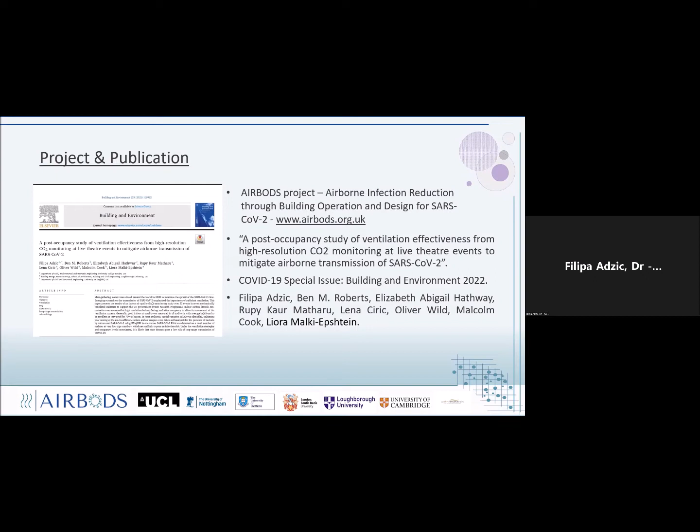We can all remember the closure of mass gathering events, which proved crucial in pandemic mitigation from very early on. In the first 12 weeks, over 15,000 theatre shows were cancelled, causing a huge loss in box office revenues. In Spain and Germany, governments initiated research programs to investigate the spread of SARS-CoV-2 in mass gathering events, and the UK government followed, setting up the Events Research Program, the largest program of its sort to date.

The aim of this program was to provide evidence allowing the government to assess and mitigate the risk of mass gathering events spreading the pandemic. The Events Research Program was organized in 3 phases and ran between April and July 2021. A range of venues over different occupancy events were monitored, and because of the project's impact, data collection, analysis and reporting had to happen very quickly, usually with just a couple of days for collection and analysis of data. So you can imagine this was quite an intense time.

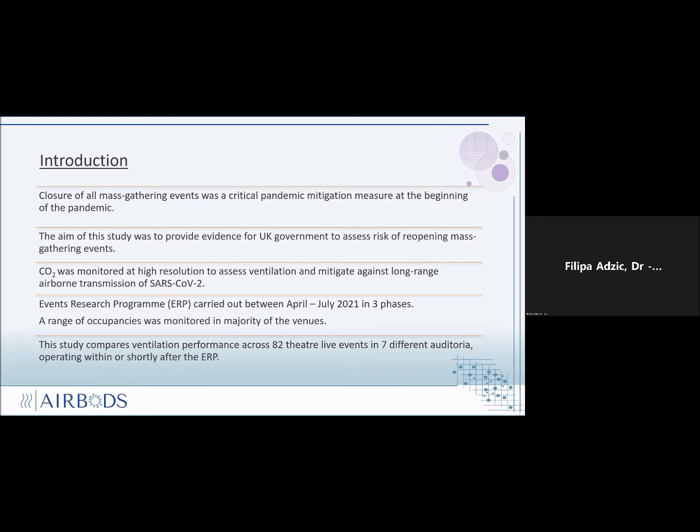Amongst other research methods, high-resolution CO2 monitoring was deployed to assess ventilation provision in different spaces within these large venues. As part of the ERP, we also monitored different events including sports venues and nightclubs. But today I will focus this talk on monitoring 7 different theatre auditoria over 82 live events operating within or shortly after the Events Research Program. I'm very happy to give this talk because personally I'm a big fan of the theatre.

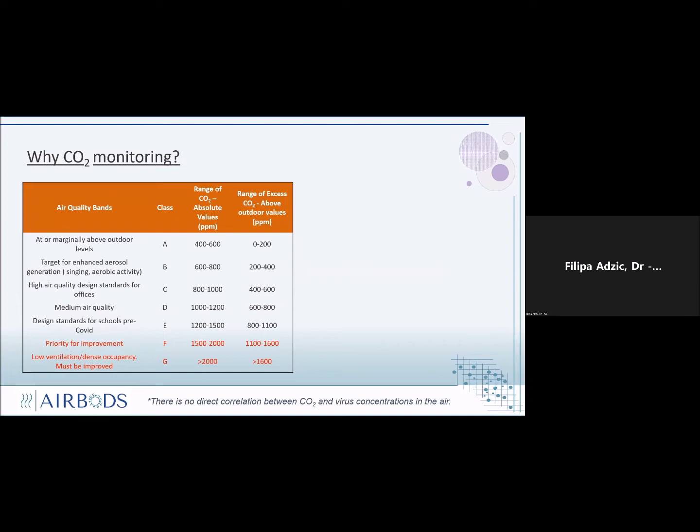So why did we do the CO2 monitoring? As it's widely known, ventilating indoor spaces dilutes and removes airborne viruses - we've all heard this story before. CO2 and virus concentrations in air have no direct correlation, but CO2 can definitely be used as a proxy for evaluating ventilation.

I wanted to briefly go through this table developed for the Events Research Program by our group, used mainly to classify the spaces we monitored quickly. This table was developed based on existing British standards, SAGE and CIBSE guides. To give you some perspective, medium air quality in this table is the normal expectation level for an office, and spaces classified as F or G for prolonged periods of time are identified as priority for improvement.

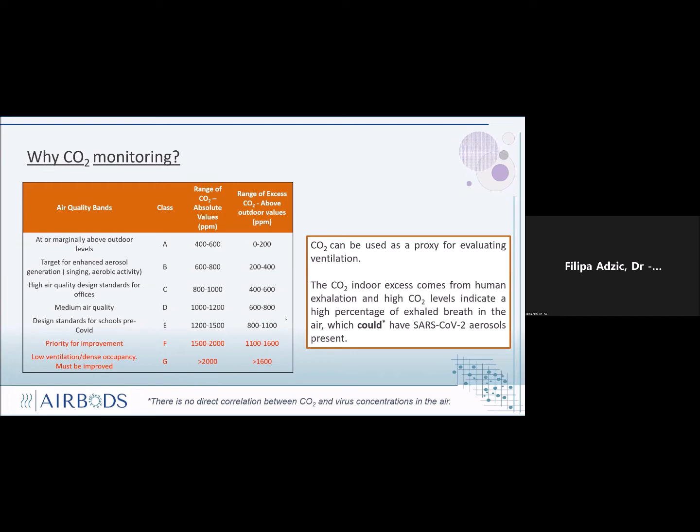Just a brief overview of the venues and events we monitored - it's quite a nice mix of spaces. Some venues, such as Piccadilly, Lyceum and Grange theatres, are more than 100 years old, while others such as Crucible and the Playhouse in Leeds were built in the last 50 years, and the O2 Arena and the ACC Conference Centre in Liverpool were built in the last 20. In total, 7 venues were monitored over 82 events with varying occupancies, and they are also different period buildings.

They all had mechanical ventilation in the auditoria - some were supplying air beneath the seats and extracting at ceilings, others were supplying at high levels and extracting below the seats. So it's really a mix of mechanical ventilation strategies.

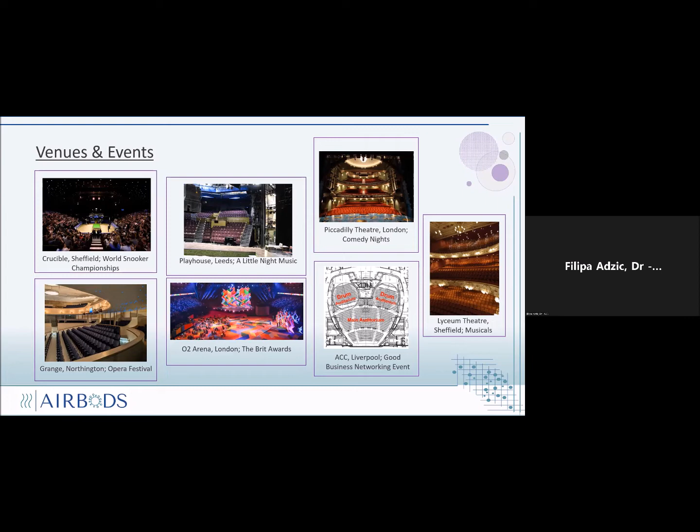Here's a brief overview of how we monitored the CO2 - you can see the little sensors we used. They logged CO2, temperature and relative humidity every 2 minutes. The majority of the sensors were installed at the back of or under the seats, within the breathing zone of occupants, and away from ventilation components such as inlets. Sensors transmitted data through gateways into an online dashboard, which could be monitored by the research team during events, but we also logged the data for detailed analysis afterward.

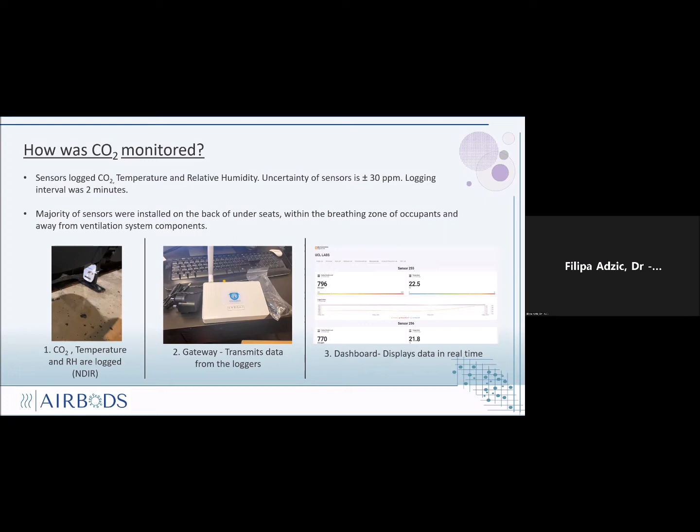So when I say high resolution monitoring, what exactly do I mean? Mostly, I mean installing a large number of sensors within one space, such as an auditorium, and separating the space into multiple monitoring zones. You can see how zones might be defined in a single space in the top image here. Each zone would have 2 sensors and would consist of a few rows grouped together.

Apart from monitoring one space at high resolution, multiple spaces within these venues were also monitored based on their use. It's important to note that in theatres, not all spaces are for performance watching. There are also bars, which are used completely differently, arrival areas, and dwelling areas. So it's important to keep in mind that it's not just the auditoria.

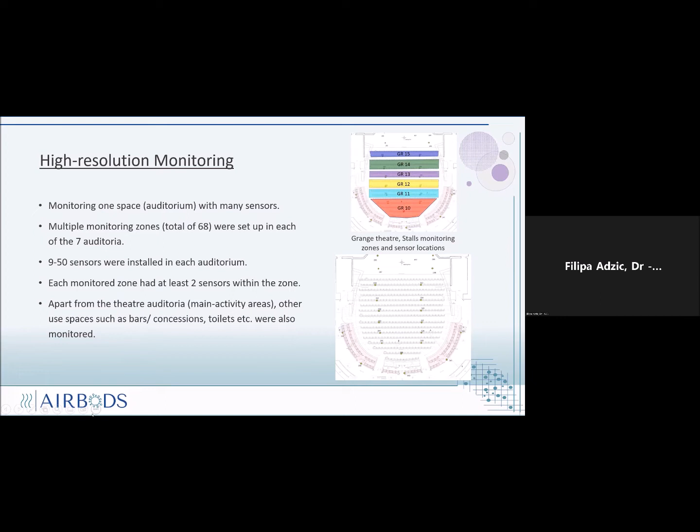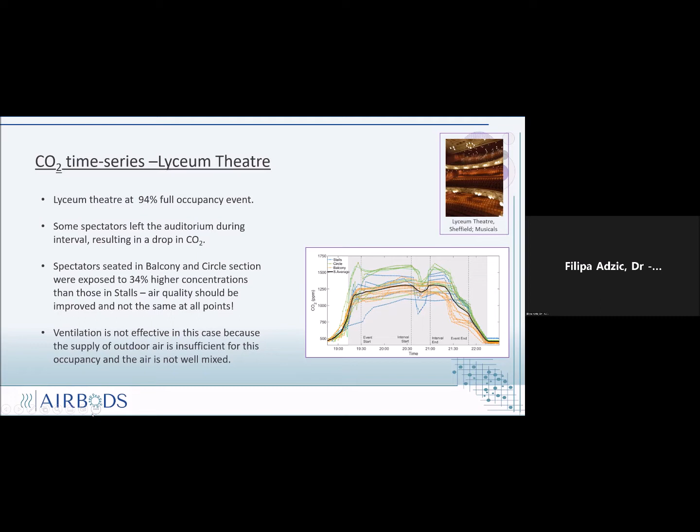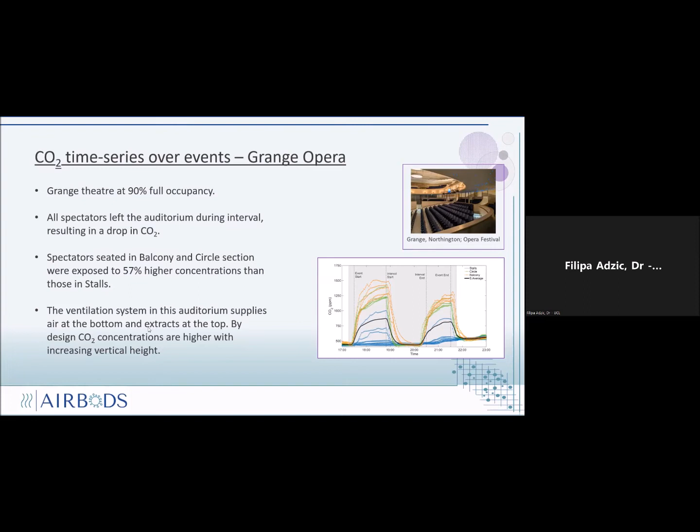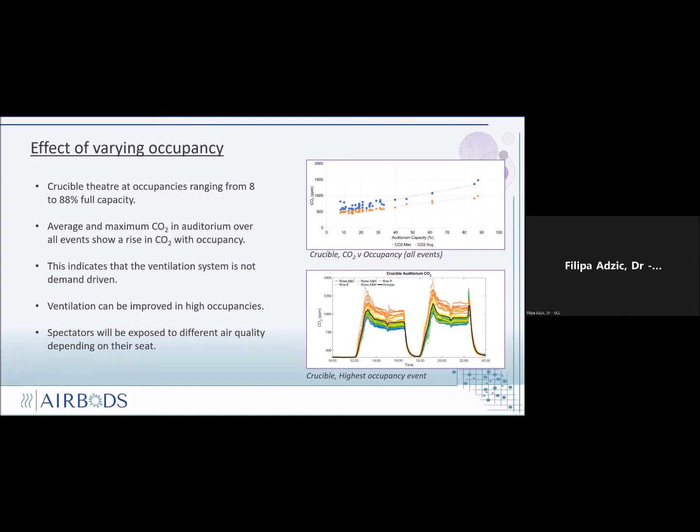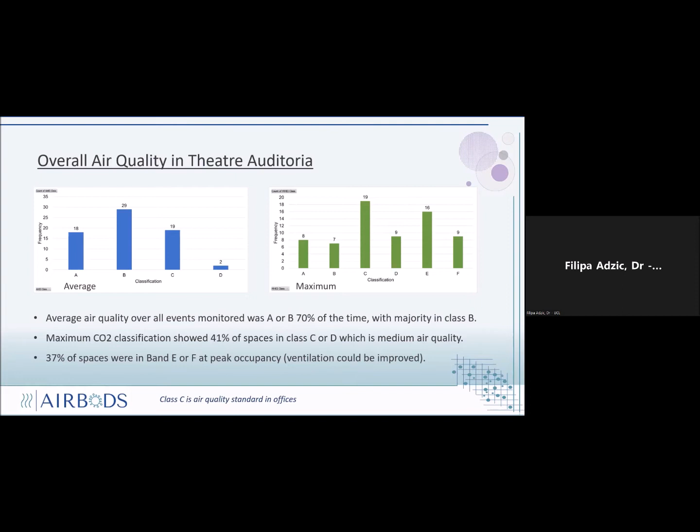To make some conclusions, high resolution CO2 monitoring allowed us to identify if the air in theatre auditoria is well mixed and distributed. This is very important, as effective ventilation doesn't only depend on ventilation rates, but also the appropriate distribution of outdoor air to all areas.

In the theatre study that we published, we made a recommendation that event intervals can be used to reduce CO2 concentrations and overall exposure to exhaled breath. But it's important to bear in mind that crowding issues in other spaces within the venue can occur.

Overall, most zones within the auditoria had an average of A or B class air quality, which is good. CO2 monitoring can be used to inform quickly about areas that need improvement and in which scenarios improvements are necessary. This was highlighted during the events research program when we had to deliver results in seemingly impossible deadlines.

Finally, high resolution monitoring does not have to be permanent. It can be only temporary, and this can provide very valuable answers in a short time period.

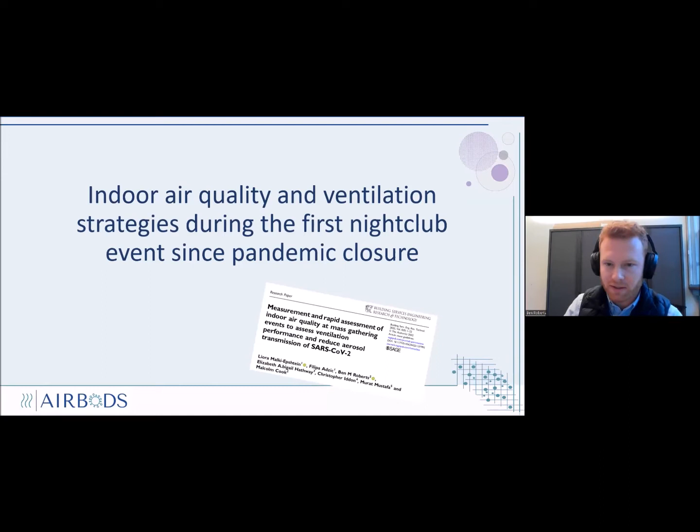This was the first ever nightclub event to open after the pandemic. We were lucky enough to be in there monitoring air quality, and we've got a paper accepted to be published very soon on this. The nightclub event was held over 2 nights, the 30th of April and 1st of May in 2021, and they packed 3,000 people into a large warehouse in Liverpool.

It really was a huge space. We had 33 CO2 sensors placed around in cages, which we thought would be a good idea because 3,000 young people having been locked away for a year might be a bit rowdy. But as it happened, they were all very well behaved and we recovered all of our sensors.

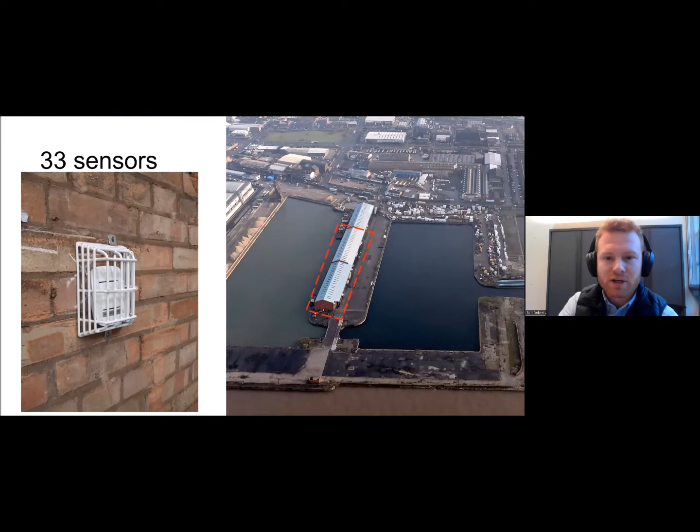It was a huge space with huge ventilation openings, 160 meters long with 7 by 7 meter ventilation openings. There were 6 of these huge doors, only on one side, so there was no ability to cross ventilate, but there was certainly the ability to have sufficient ventilation through these openings.

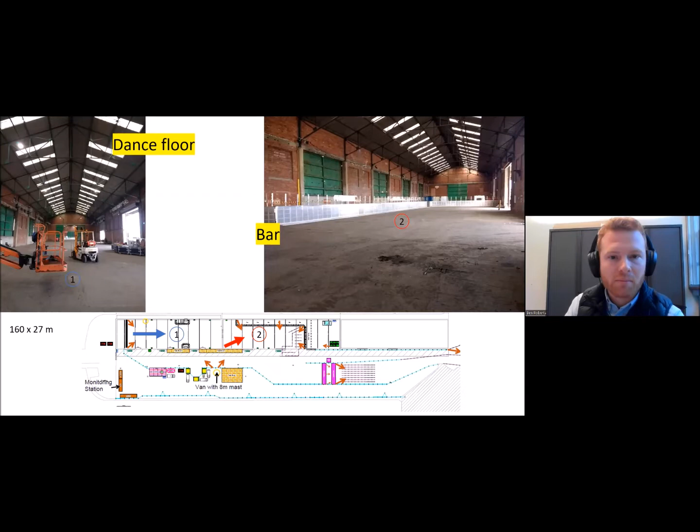We had 2 main parts of the warehouse: one end was a dance floor, the other end was a bar area. The dance floor area had these huge doors, and they pulled the shutters down halfway and then put plastic butcher screens across.

This was all about trying to reduce air and noise moving in and out of the venue, but it actually had the effect of stopping air from moving in and out. The bar area, down at the far end, had the full doors open throughout the event. Here's just an example of butcher screens, in case you don't know what I'm talking about.

So the event kicked off, 3,000 people packed into this warehouse watching a variety of DJ sets. And here's some of the results.

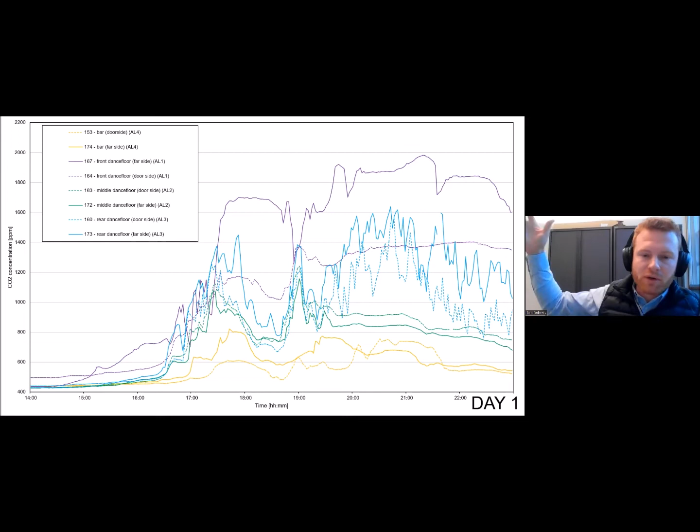The bar area, at the far end with the 3 big open doors, is this yellow line along the bottom. Throughout the event on the first day, the CO2 levels remained quite low, which indicates a reasonably low risk of exposure to exhaled breath, which may or may not be contaminated with virus-laden aerosols.

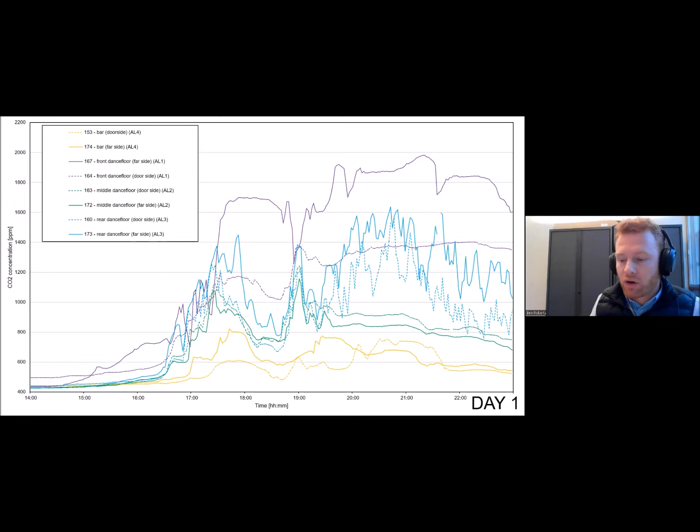However, close to the front of the stage, where people were densely packed and those ventilation openings were blocked, CO2 levels were much higher, particularly on the far side, furthest away from the door. CO2 levels remained quite high through the majority of the event, from around 5:30 in the evening all the way up to the event closure at 11 o'clock at night, staying at least above 1,600 parts per million, which indicates a high level of occupancy relative to the ventilation available.

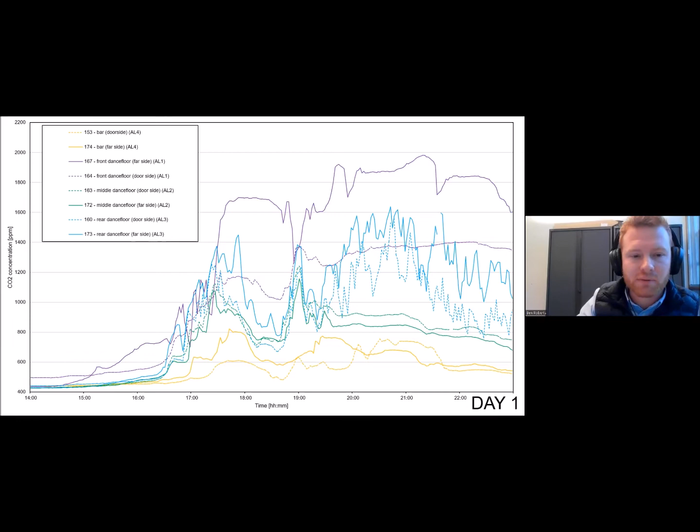So just to explain graphically, the worst place to stand if you were wanting to get exposed to other people's exhaled breath was at the front of the crowd.

The best place to be was right at the back in the bar area, having a drink, popping in and out of the big open doors.

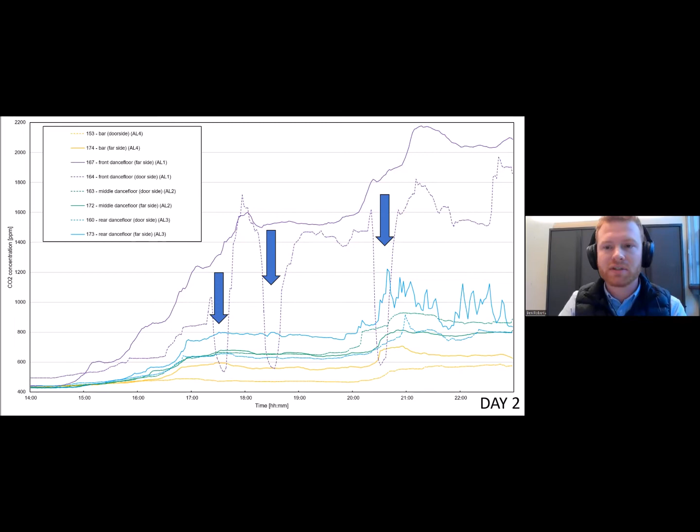So what this tells us is that had these doors been open, ventilation potentially would have been sufficient for the number of people, but it was because the doors were closed that caused the problems. So we had very high CO2 far from the door, but intermittently lower CO2 close to the door openings.

We were very pleased that some of the events were covered in the newspapers. It's not often that ventilation research makes the front pages.

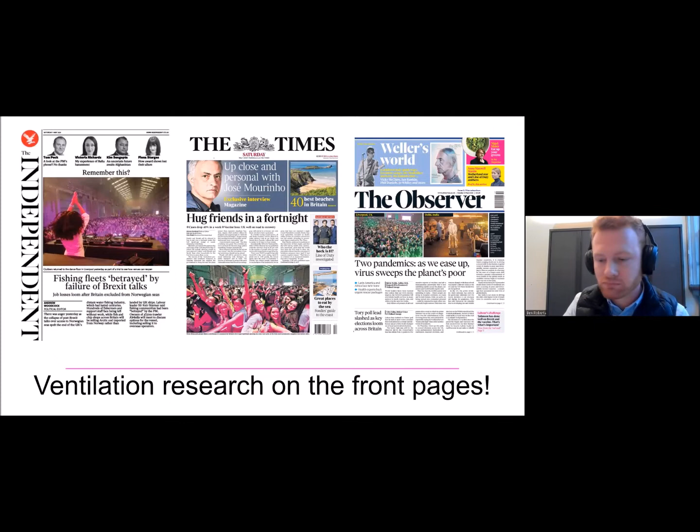We've got two papers. One's a conference paper, which has already been published, which you're very welcome to go and have a look at. Another paper will be coming out very soon. There's also a blog on the AIRBODS website, which you can go and have a look at.

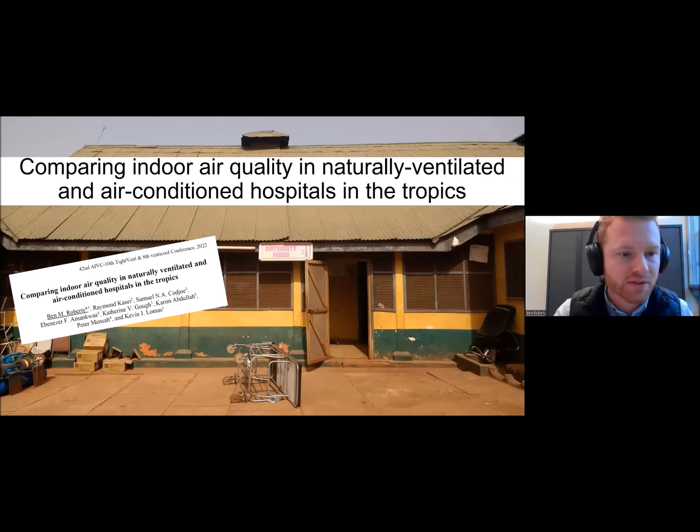The second part of my presentation, for a bit of variety, is talking about some of the work I've been doing in naturally ventilated and air-conditioned hospitals in the tropics. I recently published a conference paper on this, which you're also welcome to go and have a look at if you want more information.

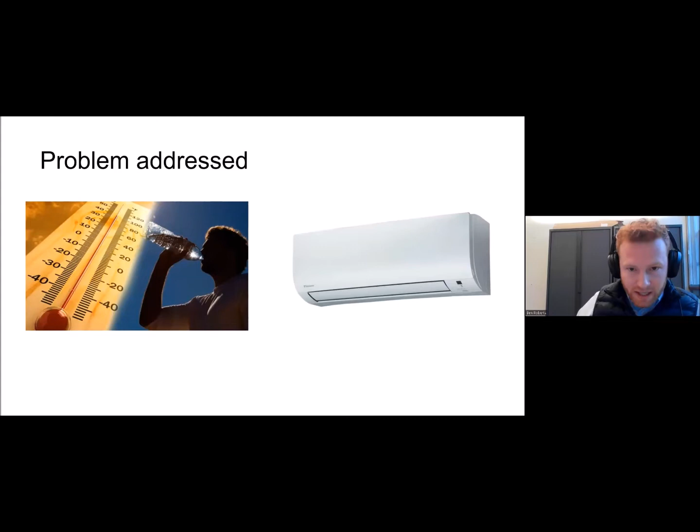Climate change is driving increasingly high temperatures, particularly in the tropics, which are already very hot places to be. Because of that, hospital buildings are increasingly being retrofitted with air conditioning units, which are recirculating air conditioning units that provide cooling without introducing fresh air ventilation.

So the aim of my project is to use ventilation to provide low or zero energy cooling whilst diluting airborne viruses and preventing mosquito-borne diseases. That's not just a case of opening up and allowing maximum amounts of ventilation, because that would potentially let mosquitoes in. So I've got four hospitals in my study.

I'm just going to present some of the results from two of the hospitals today. In some of the wards, we have mechanical ventilation, particularly in the modern hospitals.

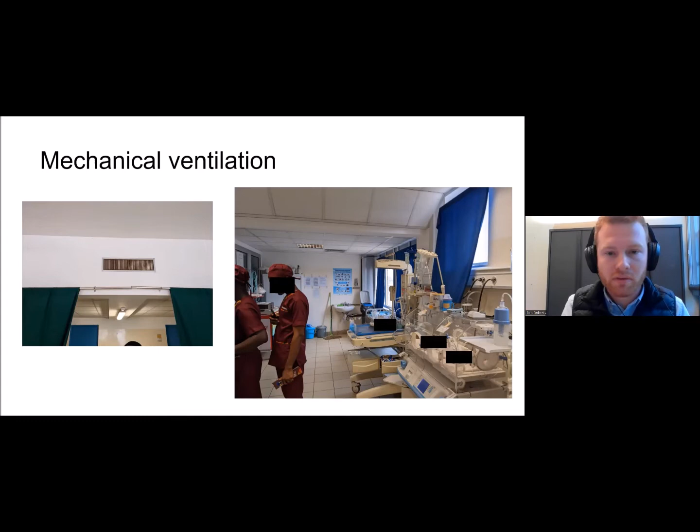The image on the right is a neonatal intensive care unit. So we have very vulnerable occupants, small babies, who have such little fat content in their body that they're not able to maintain their own internal temperature. So we have to provide a thermally comfortable environment for them here.

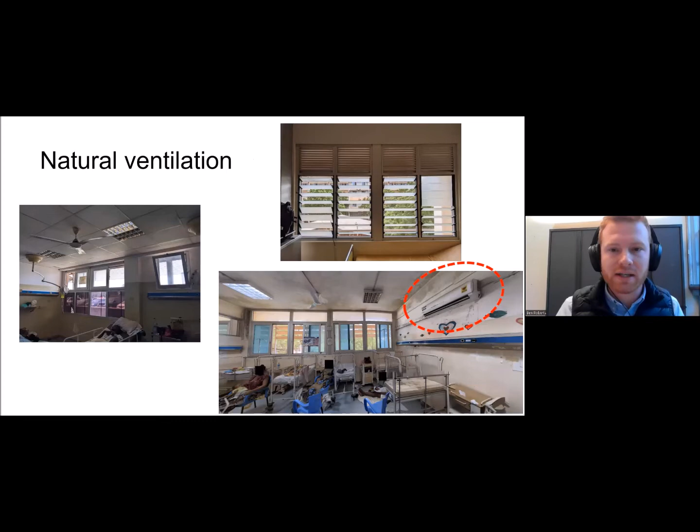But in most of the other wards, they are naturally ventilated with either louver windows in the older hospitals or sliding windows in the new hospitals. On the right-hand side, I've circled in red one of the recirculating air conditioning systems that's been installed. The wards can be very crowded, so not only have we got patients in there, there's usually visitors and also a large number of nurses, doctors and trainees.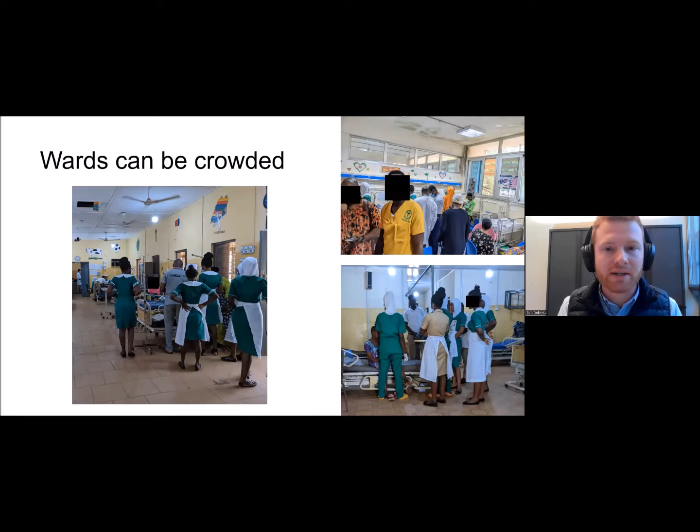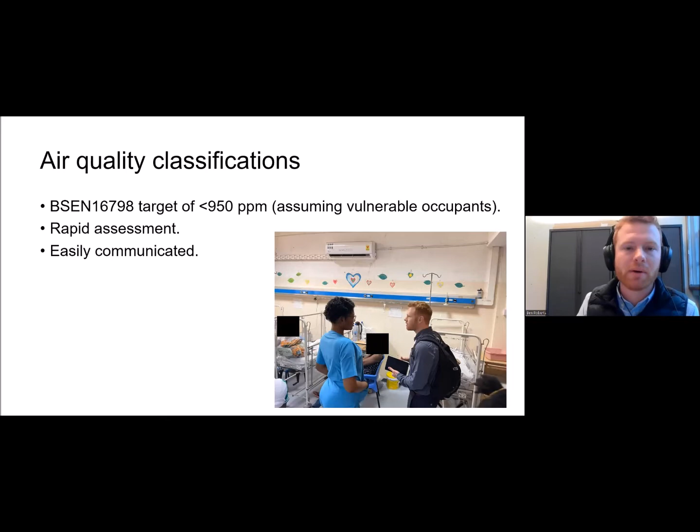So we installed CO2 sensors using a very similar methodology to the one used on the AIRBODS project, with CO2 sensors installed around the various hospital wards. Then to classify the air quality, we use this very basic classification of 950 parts per million; we want CO2 to be below that value.

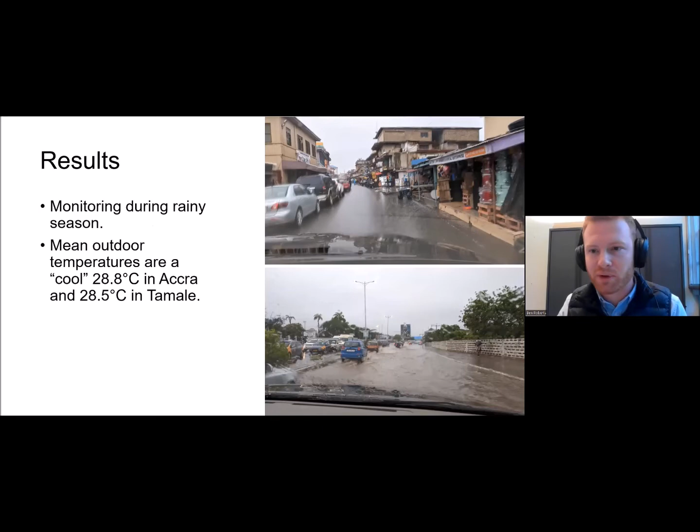I'll show you some results now from the rainy season in Ghana, which was 28 degrees. I found it very, very hot and uncomfortable, but everyone living there told me this is the cool season, we feel cold. So here's the CO2 concentrations in the two hospitals.

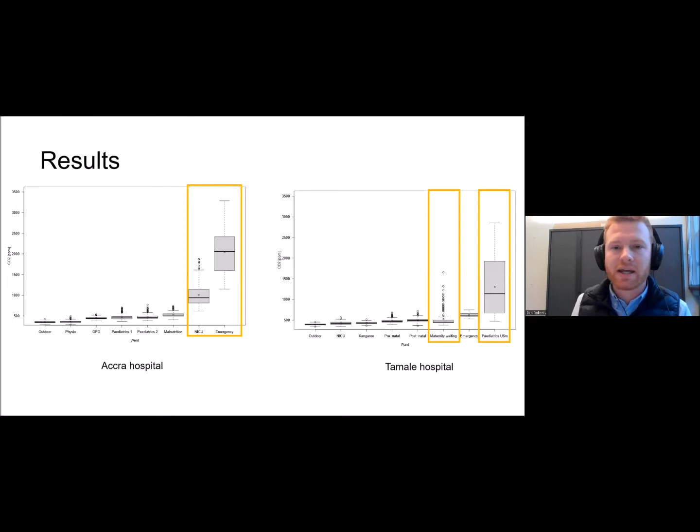Whilst most wards had very low CO2, the ones with yellow circles around them are the wards with recirculating air conditioning. I think it's no coincidence that the ones with the recirculating air conditioning had the highest CO2 concentrations.

Looking at some carbon dioxide profiles, in this ward we were told there were children under 6 months with their parents. The parents were telling the nurses at nighttime that their children were too cold, so please close the windows. You can see in the profile that towards the end, when windows were closed, the CO2 concentration builds up overnight, and then around 6am when the windows were opened, the CO2 concentration drops. So clearly there was sufficient ventilation through the windows, but because the windows weren't being used effectively, the air quality was potentially poor.

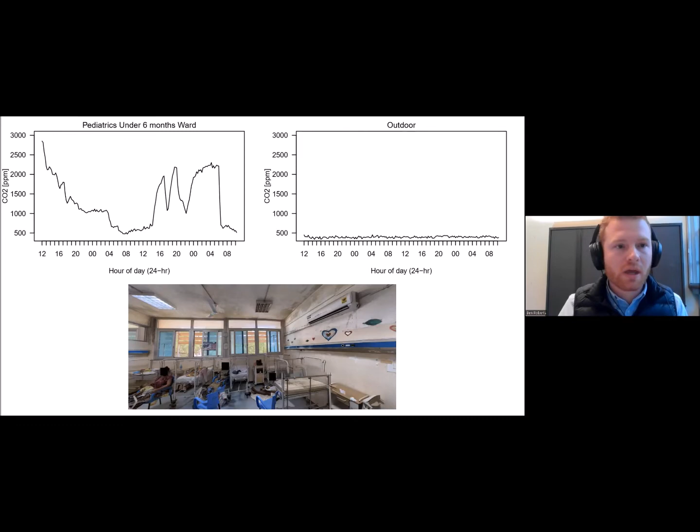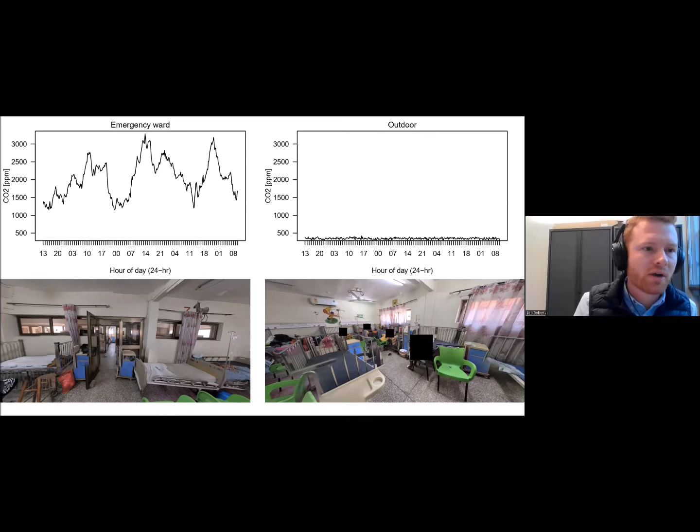In the emergency ward, the ward was constructed with other wards around it on 3 sides, and the only window openings to the outside were blocked by 2 beds at the back of the ward. So here, to provide thermal comfort, windows weren't used, but the recirculating air conditioning system was used instead. This gave potentially good thermal comfort, but very poor air quality, with CO2 concentrations in some cases over 3,000 parts per million.

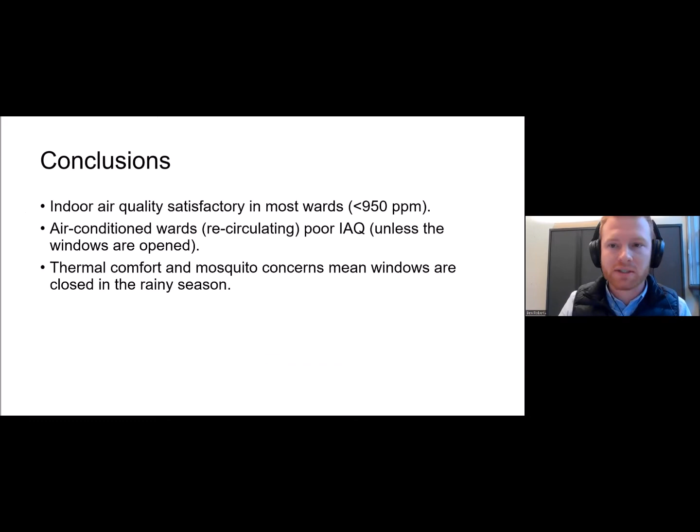So whilst air quality was satisfactory in most wards, it was the recirculating air conditioned wards where air quality was poor. It was thermal comfort and concerns about mosquitoes, which I didn't mention, that are the main drivers of window opening, not concerns about indoor air quality. You can read my latest conference paper on this. Thank you very much for listening.

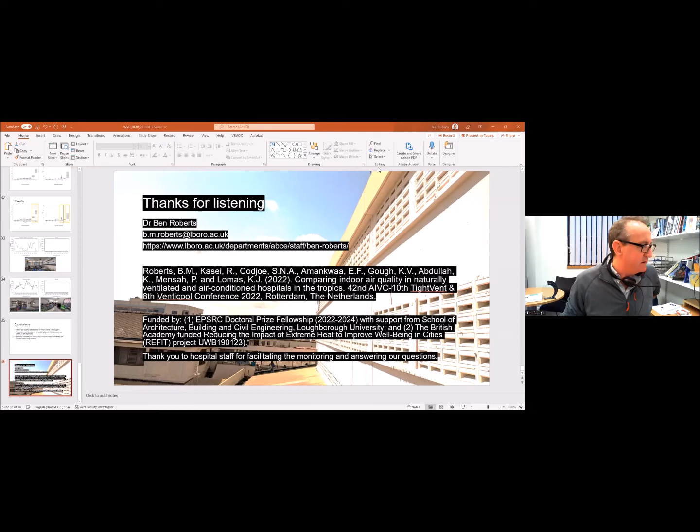Yes, thank you. I just need to be able to... here we go. Can you let me know if you see this properly? Yep, that's good. Okay, fire away.

Okay, so this talk is a bit different to the other 2. I was very pleased to have Ben and Filipa's talks first, because it's really the work that we've all been doing together as a group that has been very exciting, very rewarding, and a very busy time for us in the past few years with the pandemic.

One of the things that really came out of all of this work was that there was a clearly identified need to have a space that could be better controlled, where we could do experiments on ventilation and not be at the mercy of field studies. Because what Ben and Filipa didn't really give a sense of, because they're so professional, is just how challenging these field studies are, how difficult they are, and how rare it is that we would be given access to such venues in the first place to be able to measure ventilation there and report on it.

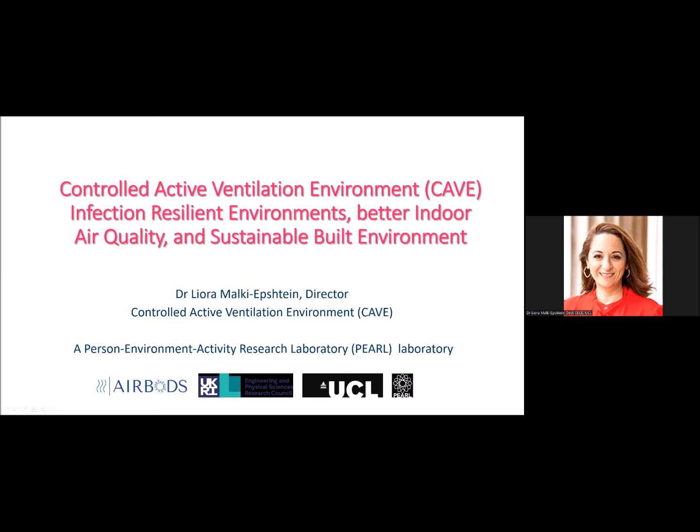So what we have started doing at UCL over the past few years - there is a very large-scale facility called PEARL. It's a research lab led by Professor Nick Tyler from the Department of Civil Engineering at UCL, where we're based as well. This is now located in Dagenham, in East London, where you can still get the space to run facilities like this. And because of what has been happening with the pandemic, it was decided to build a separate thermally and ventilation-controlled lab just next to it. That lab is the Controlled Active Ventilation Environment Lab, or CAVE in short.

So the field studies - you've seen a few field studies now in the previous talks. Obtaining permissions for monitoring and for sharing data can be quite challenging. Sometimes people just don't really want to participate, or they might want to participate mainly if they think the results will be very good, which is not entirely helpful. The projects also, between getting into local risk assessments and having to transport equipment on site and working safely around their usual activities that are already going on, especially when you're talking about live events that have a lot of people around, that was quite challenging.

What is quite nice about a lab as well that can be done, besides the fact that you can start building long-term collaborations between academia and industry and research agencies and the professional bodies that actually look at design of ventilation, we can really on a physical level just create controlled conditions. We can maintain those conditions for a while. We can use them to validate models, because we can take measurements at quite a lot of detail.

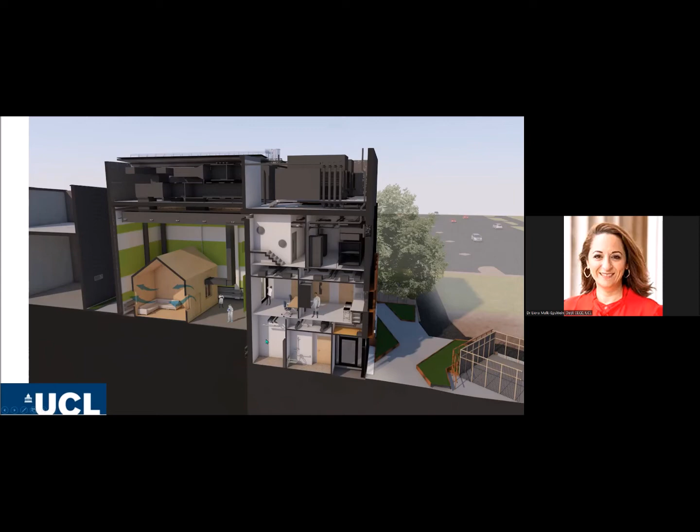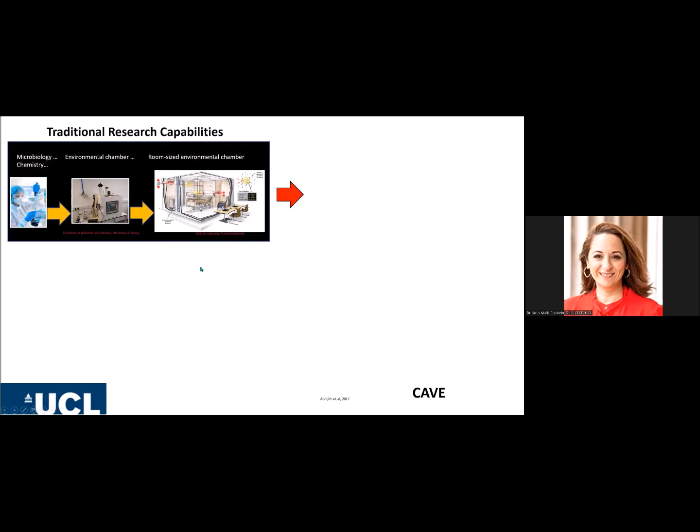Looking at traditional research capabilities, there's a lot of work that can be done at a very small scale. There are environmental chambers around the world—this is an example from Purdue, and there's an air pollution test chamber from the University of Surrey. What we're trying to do is scale all of this up to capture the sort of problems we see in real life.

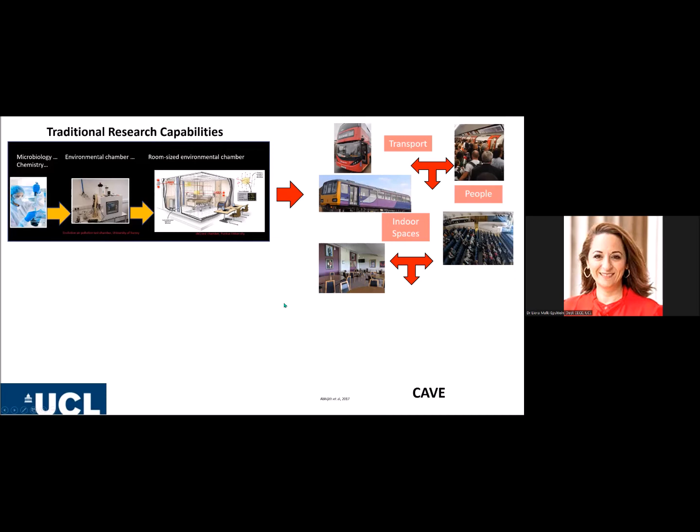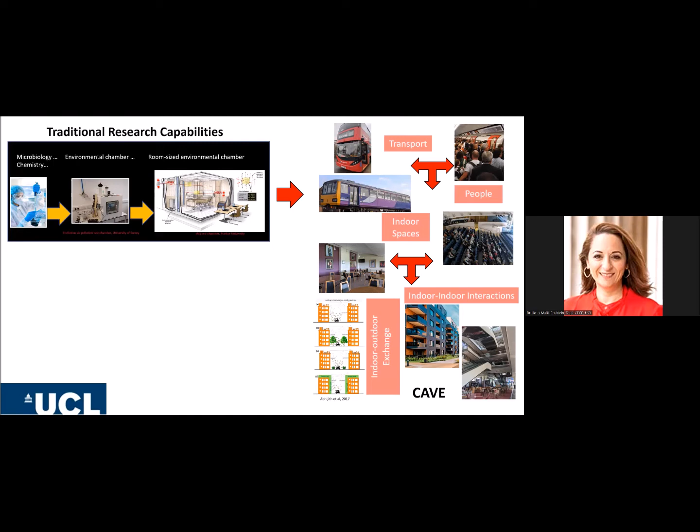So it's transport, where you have a lot of people. There are indoor spaces like the ones Filipa talked about, like theaters. There's interaction indoors in very large buildings with several stories or mezzanines, where you want to see what happens vertically with the air. There's exchange of pollution between indoor and outdoor, for example in street canyons. CAVE is designed to look at all of these things.

So its capabilities cover transport vehicles and public spaces—restaurants, theaters, schools, healthcare, any type of space used by many people. We've designed CAVE to allow us to introduce people into the space, potentially up to 100 participants, so we can see how the environment affects them. Are they comfortable? Are they happy? What are they doing? How are they performing cognitively if we're simulating a school?

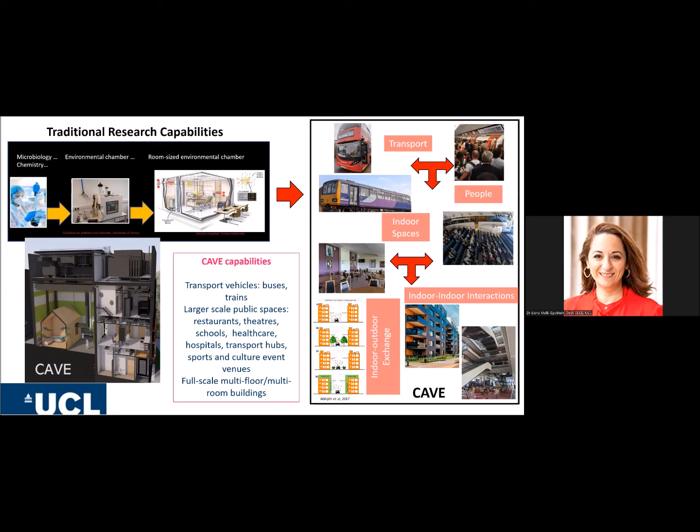And at the same time, also see what people do to the environment. So the lab is really designed to address major challenges in the built environment we're living in at the moment. We're looking at population growth, urbanization, and climate change.

And the problems we have in our cities now: overcrowding, traffic, which leads to air pollution, transmission of infectious diseases. Everyone is now fully aware of that problem. And of course, trying to balance those with minimizing energy consumption and carbon emissions, when in fact the solutions are almost exactly at odds with each other.

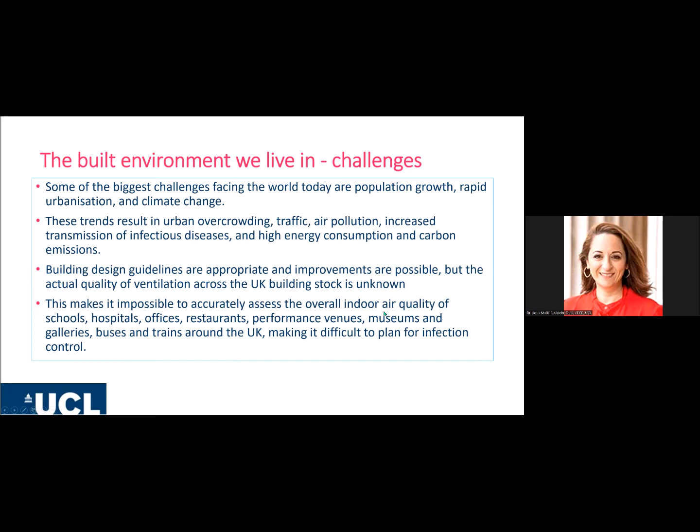So although the building design guidelines are great and perfectly appropriate, and there are lots of technical solutions to improve things, we don't actually know what the quality of ventilation is in the UK. Finding out that knowledge is a humongous task, and yet it was very important when we tried to make plans for infection control and wanted to know the state of the nation, how ventilation is working in practice around the UK.

So with CAVE, we'll be able to classify the built environment, test the human interactions with them, characterize and measure them to the nth degree, and then create realistic scenarios that are hopefully representative of what happens out in the world, so we would be able to estimate at least what could be happening everywhere else.

So we can look at specific project ideas, testing solutions to reduce the risk of poor air quality, retrofitting, testing ventilation technologies that are low energy and climate efficient, and quantify the actual trade-offs. If you try to address one target, what actually happens, what are the unintended consequences of this? And how can you quantify the energy consumption when you're heating up or cooling down a space?

And also to understand, when we have people in there, how do we actually improve their experience? Their experience of architecture is something very important for architects, and to understand their health, their well-being, their comfort.

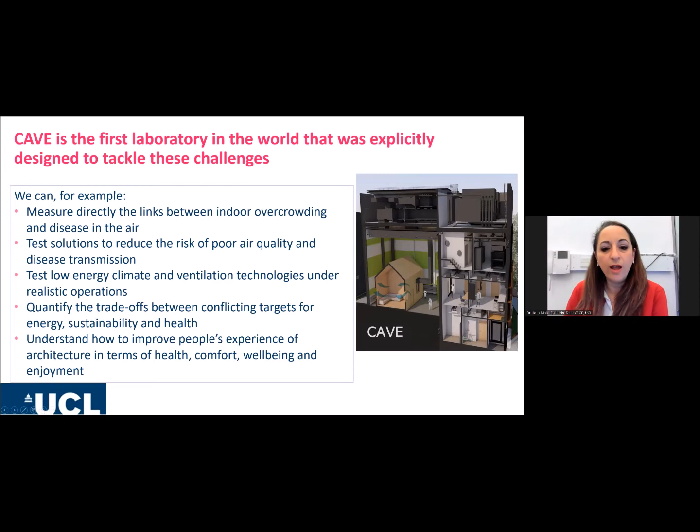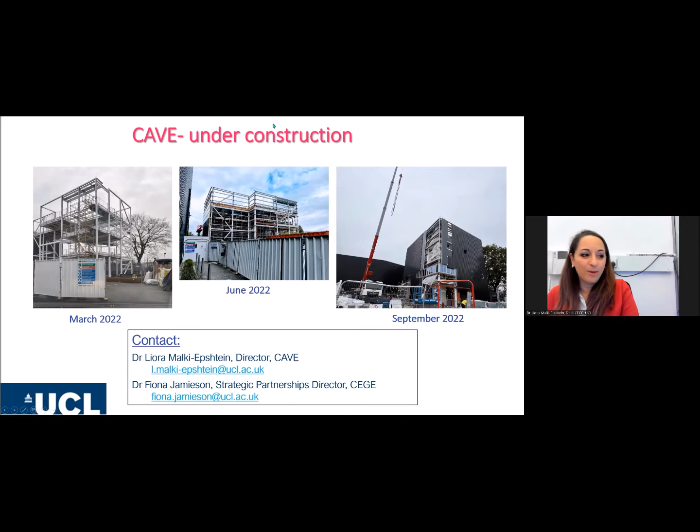Brilliant, thank you very much indeed. Thank you, really interesting stuff. I'm sure - when's it due to be finished? February 23, well, fingers crossed. Considering the state of the world, you can't really predict anything these days, but it seems like it will be. It's a construction project after all as well. There are.